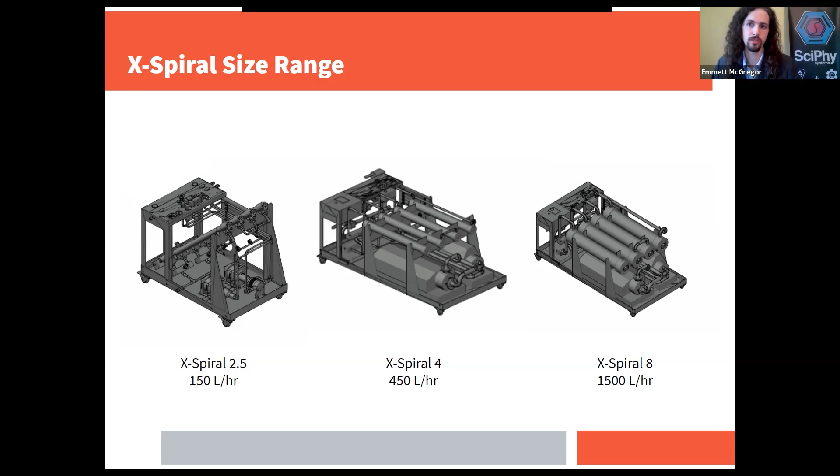And that's also our design philosophy on the secondary solvent recovery stage. Essentially what we're looking at is an output of 2-to-1 solvent to oil generally, right? So it does require a secondary stage of solvent recovery similar to an FFE. Some falling film evaporator companies have claimed that you do not need to recover any solvent after it comes out of the falling film evaporator in order to have a saleable product. We have yet to find a satisfied customer with that approach. All of our units include a secondary solvent recovery stage to get down to that true 5,000 ppm or below saleable product level based on the regulatory limits of the major player states in the United States.

So that will come very soon. We're going to have a plug and play solution tying that in. Can't give away too many details on that now, but that is something to keep in mind for folks looking. Yeah, it's a good point. And in regards to people setting it up in their current setups, it can often work really well in their favor because whatever they were using originally for their primary recovery can now become the secondary recovery. If they used to run everything through a 20-liter rotovap, you can keep that, and all you're doing is applying a booster to get 10 times as much done.

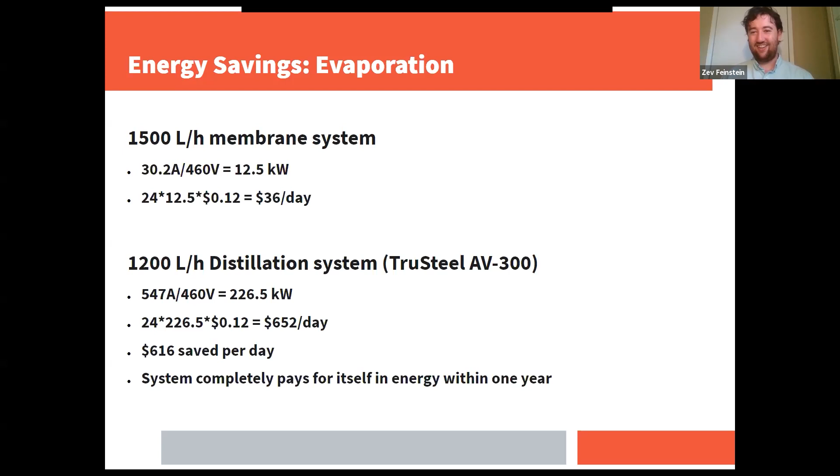So you're potentially not only going to save money on the upfront capital purchase and on your ongoing electrical demand, but there's also a potential to save even more money with additional tax incentives for states and countries that have energy savings, sustainability tax incentives. That's a really good point that I didn't even think to list on here. I'd be interested in going through that analysis at some point. Yeah, absolutely. I think it's an angle that too few operators are taking, talking to their states about those programs. They really can make a big difference to the bottom line when bringing a new plant up to operation.

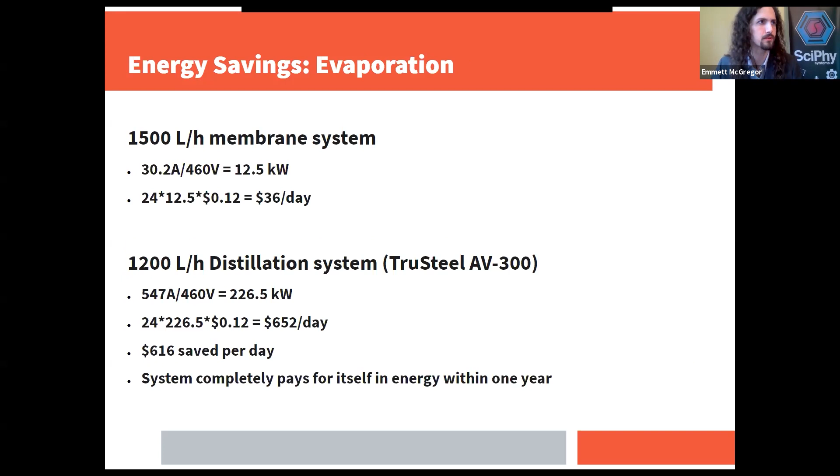Let's see here. We haven't gone into too much depth on dewaxing yet. Let's talk through dewaxing as a process first before we get into these numbers. Yeah. So a lot of folks are using winterization, and that means they're using a temperature swing with oil in a solvent, and they're essentially chilling out the waxes and making them separate out from the solution at a set temperature. We commonly see ethanol being used for this process. More recently, there's some methanol being used that has a higher temperature at which you can remove those waxes, although there are some toxicity issues with the use of that solvent that need to be very tightly considered.

You really have to get it all out at the end of that process. So that's a deeper concern. But what does this process look like for dewaxing? How is it actually functioning?

Yeah, so the way this works, the function of the winterization step is practically identical to the function of the desolvation step. You take your feed solution, which is at room temperature. Looking at it, it will just look like all the fluid is in solution. But at a molecular level, there is a difference in size between the waxes and the THC or CBD that can be exploited here.

And when you are doing this feed, the large molecules here you could take to demonstrate the waxes in this approach, and everything that goes through is the cannabinoids, the terpenes, and the solvent. The principle is exactly the same for desolvation, except in that case, what's getting blocked is the terpenes and the cannabinoids, and only the solvent is going through.

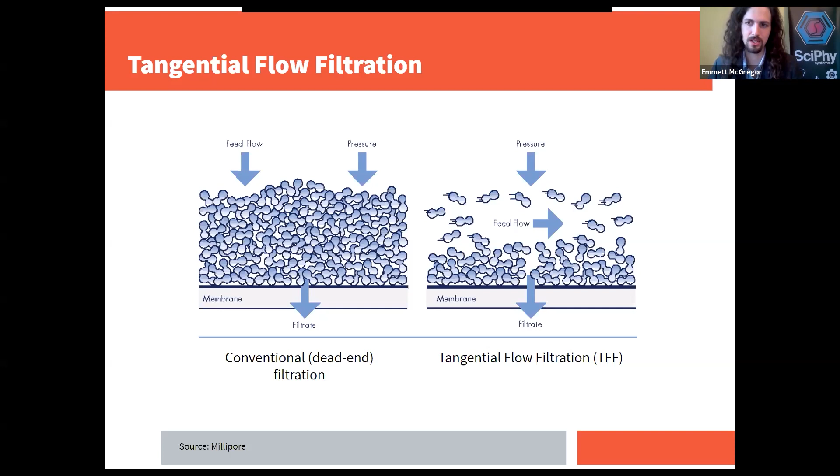So let's get back to the winterization energy savings. Now, obviously, with traditional winterization, especially using ethanol or some of these other solvents where you have to go quite deep into low temperatures, those chillers are eating up some energy. Let's talk comparison points here.

Yeah, compared to solvent recovery, here we're looking at two processes that are very different in the way they're executed. A solvent recovery membrane is basically a drop-in replacement for a falling film, whereas this requires a little more consideration to compare apples to apples. But the membrane's simple enough. It operates the same way as the solvent recovery did. The energy consumption is the same whether you're running winterization or solvent recovery, because the skid is exactly the same. The pumps are the same. The only thing that changes is you take out one type of membrane and run a different one.

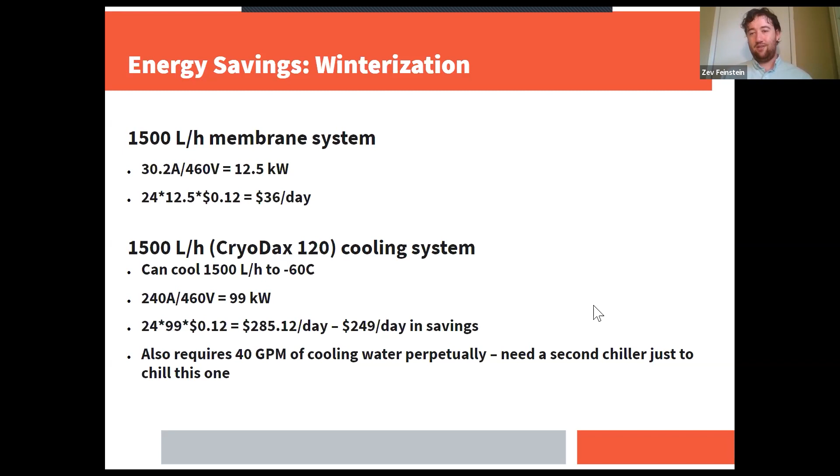But using this dewax membrane solution, you're getting that carbohydrate reduction as well. So you're potentially improving your maintenance cycle on the downstream equipment as well. Yeah, and for people who are big fans of using adsorbents in their process, putting this upstream of that is a great way to eliminate a lot of the gums and polar contaminants that tend to block the active sites and make you need to use the media a lot more than you should. Right, so again, reducing that downstream operating cost of replacement materials.

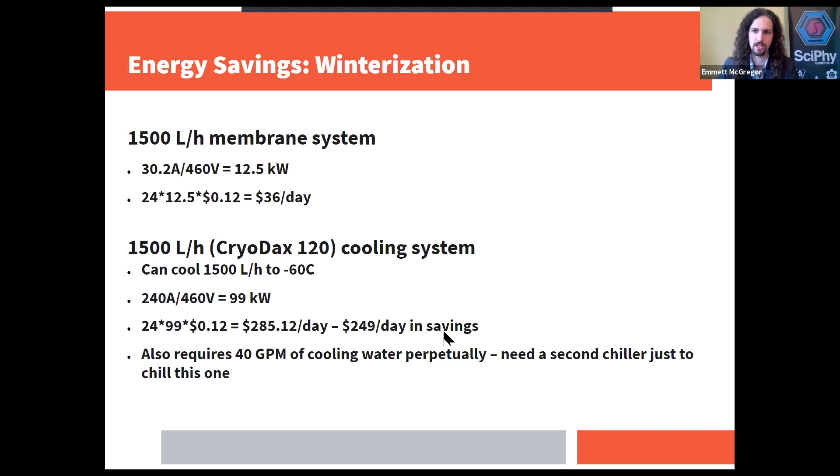Let's see, do we have any additional slides? Yes, let's talk about scale. We're talking right now about 400 GPM, but that's not the limit, right? Well, we were talking about 400 gallons per hour. Sorry. Now, if you want to have this discussion, yes, we'd be looking at more like 400 gallons per minute. Obviously, I didn't make this skid. It's not even a skid that I would make because the housings are plastic. This is from a desalination facility in Dubai, I believe.

But these sort of setups, they use what's called a cascading or multi-stage reverse osmosis setup, where instead of doing any kind of recirculation either externally or internally, they start with many parallel streams of fluid.

So say you start running, you split your feed into 4 streams, and you run them through as many membranes as you possibly can until the point where the crossflow has dipped below where it should be. And that could be, 8 membranes would be a typical number. And then because the crossflow has been brought down, say 50%, you then unite the streams into a new stream that has merged the two and now has double the flow. And you send that again through another round of 8 membranes.

So we've gone from 4 streams to 2. And at the end of that, you can merge those again to another stream. That would be called a 3-stage setup. And with a setup like that, with so many membranes, you can get 90% solvent recovery just in a single pass through this setup with no recirculation whatsoever. And when you start running it in that mode, the energy requirements are even lower than what I was depicting, even compared to the X-Spiral type of configuration. You'd be looking at only 50% the energy of that.

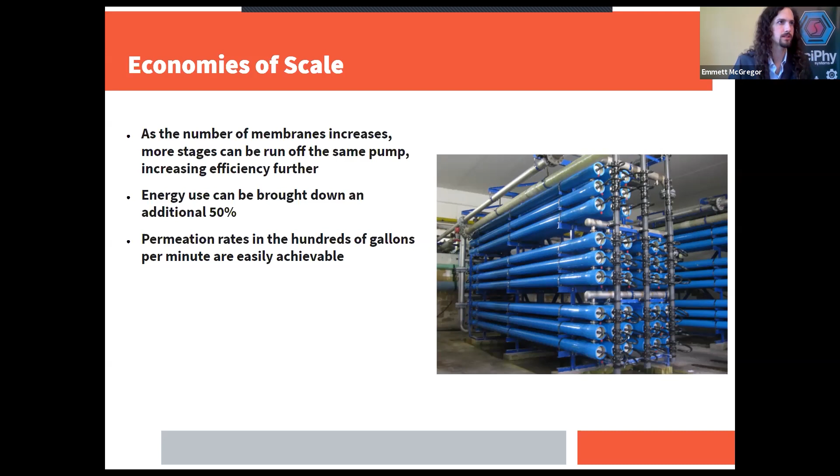Right. And we are getting towards the end of the show here. Let me make sure that. I should have stopped screen previously. Apologize. We just got a good question. Yeah. About the thing that I was planning on talking about, but I forgot to.

Where did that go? Somebody just asked about it. It's in the chat. Methanol water separation, or alcohol water in general. What about reproofing alcohols from water content? Yeah, so that is indeed possible. It isn't done in the exact same way as the X-spiral. If you were to order a unit for reproofing, it would be different from the three I showed here.

The way that works is you have these special membranes that are permeable only to water and only in the gas phase. They're actually the exact same material used to make molecular sieves. And what you do is you superheat your whole solution of water and ethanol, and you run it through this membrane, and the permeation of the membrane is under vacuum. And so when the superheated solution hits this membrane, immediately the only thing that can permeate is gas phase water.

So the only thing that feels the relaxed pressure is the water. So you boil off all the water and you don't boil off any of the ethanol. So the amount of energy used to take the phase change is much reduced to only be a portion of the solution instead of all of it. And also because this is absolutely impermeable to ethanol and very permeable to water, it doesn't experience any kind of azeotrope. It can be brought up to arbitrary concentrations of ethanol.